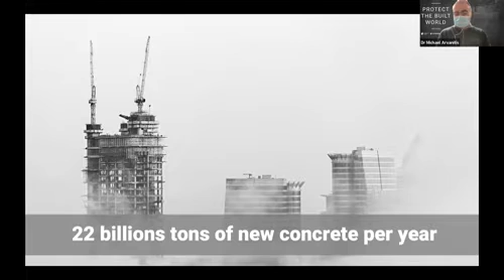So why do we really need to do concrete inspections? That's a very fundamental question that we have to ask ourselves. The main reason is that every year we have about 22 billion tons of new concrete being poured around the world. That's a big number. And out of this number, there are about 50 billion holes that need to be drilled. Why? Either for maintenance reasons or for expansion or for any repairs that need to be done to the concrete structure. So drilling a hole in concrete is never and was never easy.

You need to be very careful not to hit fundamental structure inside the concrete. That's where GPR is coming to help you. Because if you make even the tiniest mistake on the field and you hit, one wrong drill is enough to cause very costly damage to the building, to the structure that you manage, and can be very catastrophic for all.

So what we are suggesting is to use ground penetrating radar before you drill or plan to drill a hole into your concrete. We have 3 different hardware units that are combined with unique software and a whole ecosystem platform that can help you with your on-site needs. What you see on the left side of the slide is a GP8000. It's our workhorse ground penetrating radar that's being used to scan large areas inside concrete.

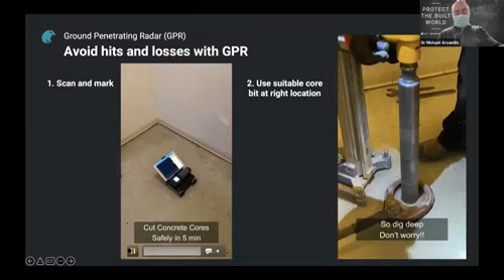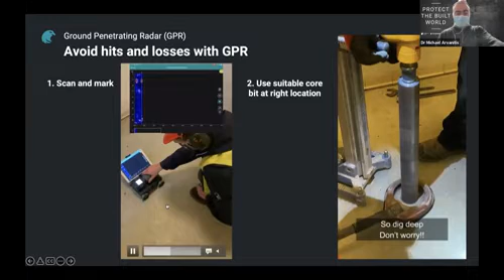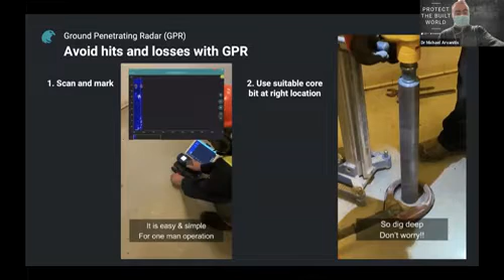The way we do that is that we have our ground penetrating radar. It's run by an iPad, so you can see the screen, and you scan and mark rebars. You just push or pull your equipment, you see the rebars on the screen, and then you mark where the rebars are. We do that in two directions, just to make sure that we see every single target, no matter if it's perpendicular or parallel to the direction that we are moving

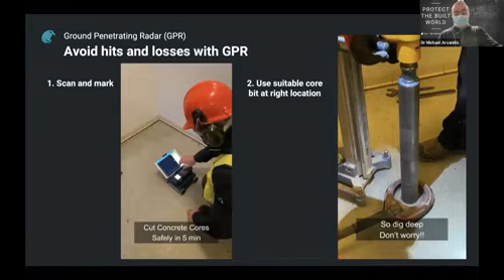the ground penetrating radar. And as soon as you have a small tomography of the area that you would like to scan, you don't need to worry anymore, because you are absolutely sure that the area where you're going to drill the hole is clear. So you can dig deep, like the video that we see here on the right side of the screen, and you can take the core from the concrete and so on.

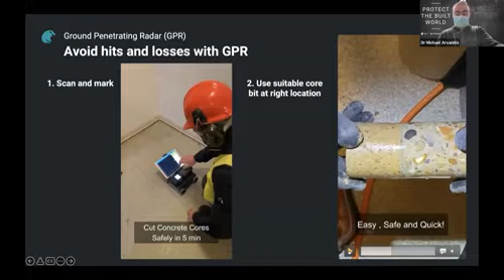So let's see the differences between the ground penetrating radars that exist in the market right now. We have two different, let's say, flavors of ground penetrating radars. One is the old technology of pulse ground penetrating radar, where you have a system that's very dependent on the frequency of the antenna that you're buying. So you have different frequencies in the market. You select a specific center frequency, and then based on that frequency, you have certain limitations on either the depth of the penetration or the resolution of your ground penetrating radar.

The rule of thumb over here is that the lower the frequency is, the deeper you penetrate, and also the lower the frequency is, the worse the resolution that you get. So if you need to find, let's say, deep targets, you need to go with a lower frequency. But the problem in this case is that the lower the frequency is, the resolution gets worse and worse. That means you need bigger targets in order for this to be detected. So this is what we call the frequency dilemma.

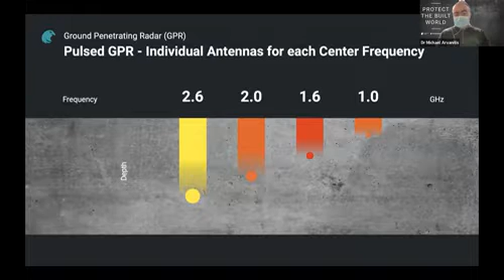And this is where we, as Screening Eagle Technologies, give an answer to this dilemma by introducing this technology, the step frequency continuous wave. So if you compare the SFCW to the pulse system, then in our technology, you don't really face the frequency dilemma, because what you have in your antenna is an ultra wideband antenna that can cover a wide range of frequencies from about, let's say, 200 megahertz up to around 4 gigahertz. And so you can see deep enough, but also you can see small targets like rebars or small cables inside the concrete and so on.

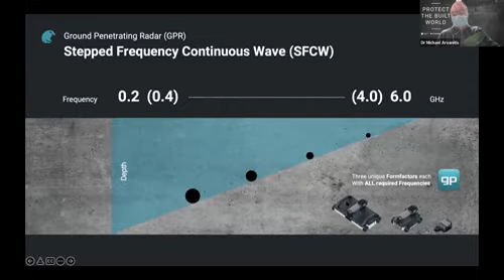And we have introduced into the market 3 different, let's say, flavors of our ground penetrating radar, depending on the needs of your survey. So if you have, let's say, a tunnel survey, you can use the GP8000. If you have areas that are tight and you don't have enough space, you can use the GP8800. Or if you have large areas and you need to scan them with one pass, you can use the GP8100. So let's see the differences between those 3. You can see the 3 different systems over here, okay?

All these are communicating wirelessly with an iPad, and you can see the data in different forms, which is very helpful if you're on the field. So you can see either the full radar version if you're an experienced user. You can see a migrated version of the targets where the hyperbolas are being removed. You can see a 2D tomography or a 3D tomography. And this is very unique to what we are offering, because no other manufacturer in the market right now can offer this type of visualization and also this type of ecosystem.

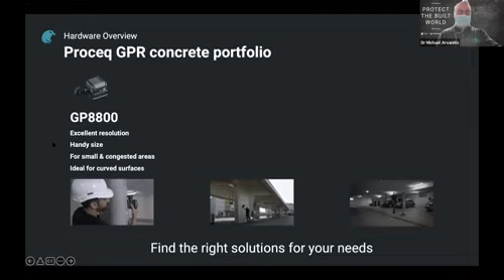So let's discuss in detail each of these three different systems and what they offer. So let's start first with the smallest in size. The smallest in size is the GP8800. It's a very small form factor antenna that carries a GPR inside it, okay? And it's very good for small and congested areas, or for curved surfaces. So if you have a curved surface, you can't really go with a typical ground penetrating radar because it can't really see the whole surface, okay? But this antenna is ideal for this, and it comes at a handy size, and it gives a very good resolution of the targets that you're looking at.

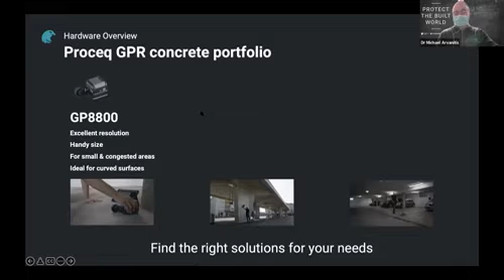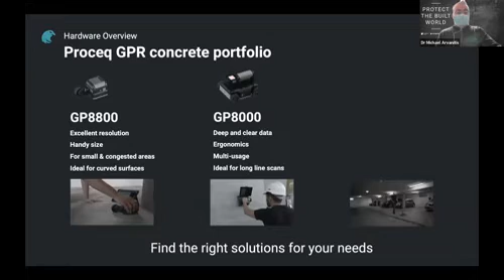Then in the middle, we have the middle size ground penetrating radar. It's the GP8000. It used to be our first one in the series. So this one can give you deep and clear data down to about 60 centimeters in depth penetration, which is more than enough when it comes to concrete applications. It has excellent ergonomics, and you can use it for many different applications, even for bridges or roads or tunnels. And it's very good for long line scans. So if you have a very long line, you can use the GP8000 just to scan this line.

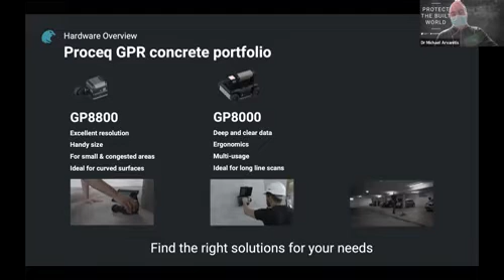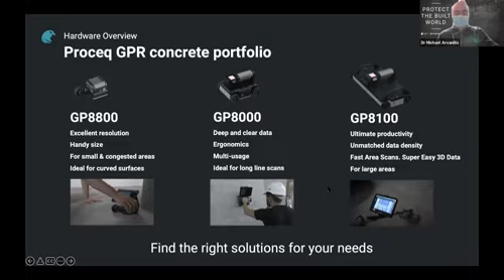Then, last but not least, we have the newest addition to our series, the GP8100. So this is perfect if you have large areas, if you need to scan areas quite fast, and if you want to take 3D tomography pictures directly on your screen. So based on the needs that you have on the field, you can select the right solution for you.

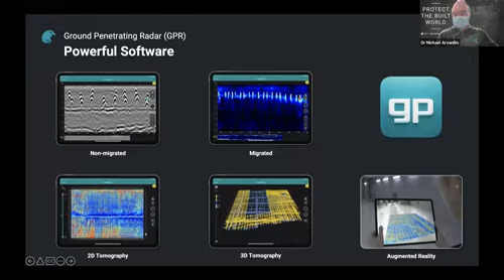So all this is being supported by our powerful software. So as I said before, you can see the radargram over here. You can see the targets at different shapes and sizes. So over here, it's a typical non-migrated radargram. Over here is the migrated, where we remove the hyperbolas, the 2D tomography, the 3D tomography, and of course, you can also play that on augmented reality on the side so people can see exactly where the targets are and get a clear picture of what's happening beneath. I have included some examples to show you with different units that I have collected.

So this is data with the GP8000. So you can see very high quality in both 2D and 3D, and you get quite good versatility. So I will stand a bit on this radargram over here on the left side. I don't know how experienced you are, but typically when we collect data, the first picture that we get from the subsurface looks like that, okay?

So what you see over here is a small, let's say tomography, a small picture of what's happening beneath the concrete. And you can see different targets that have different amplitude, okay? Some are metallic targets and some are not metallic targets. I can get information about their depth. I can get information about whether the targets are filled in with something or if they're empty, if there are pipes. I can get information about the concrete bottom, which is this one over here. And I can get information about the thickness of the cover, which is this thing over here.

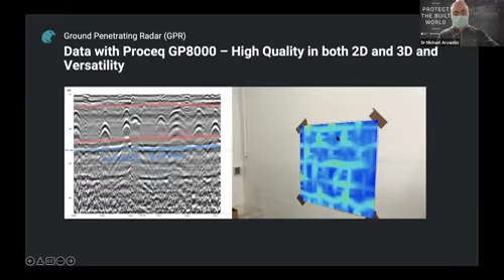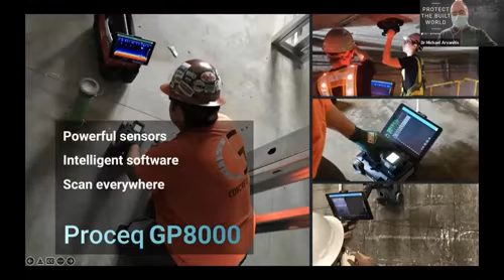And then when I'm done, if I collect several 2D lines, I can create a 3D picture and augmented reality and augment it on the real target where I need to actually drill the hole. So these are some pictures from the GP8000 in action. So you can see how people are using it. They have the iPad and they can see how the subsurface looks, like this one over here. They can scan ceilings like this one over here, or they can check walls and floors and so on. So you can scan almost everything with the GP8000.

Now, I have collected some data with the GP8800, and this is data collected from a very curved surface. If I had any other GPR, I couldn't really collect data because the GPR antenna would not really couple with the concrete. But the GP8800 is made for this type of application. So I can see data like this one over here, and this one over here, and this one over here. These are targets. So when I find the targets and I know what type of targets these are, I can select where and how deep I can drill inside my concrete, which is very important.

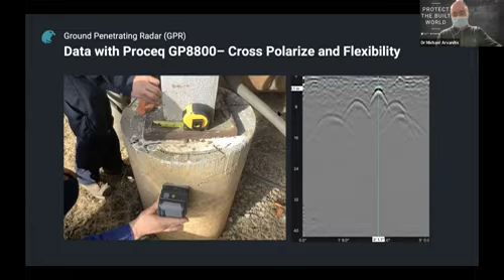Of course, I can get some other information like the delamination or corrosion that I may have. I can see also voids inside concrete and much other information that's relevant to my work on the site. These are different pictures from the GP8800. You can see how close it can go to the target. That's very important. You can get very close to the target.

You can see very close to a net, so you can collect data close to a net, and you can go in very narrow places like this one over here. Or if you need more flexibility, you can remove the battery and you can go to even more narrow places and collect data from there.

This is a very nice example from data collected with the GP8100. So this is really nice because with a single pass, I can collect 2D tomography pictures like this one. So you don't have to make grids anymore. You just go with your GP8100, collect a few lines, and then you get this tomographic picture, which you can augment on the wall or on the floor, on the concrete surface where you are looking to drill the hole. And then when it's safe, when you have identified safe areas to drill, you can go and drill without the fear of hitting something critical in the structure.

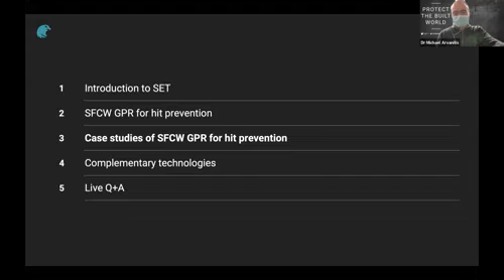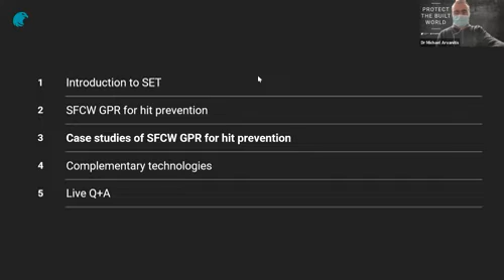So after that introduction and explanation of our GPR solutions, I'll now present some case studies which were collected here in Asia on using the SFCW GPR specifically for hit prevention.

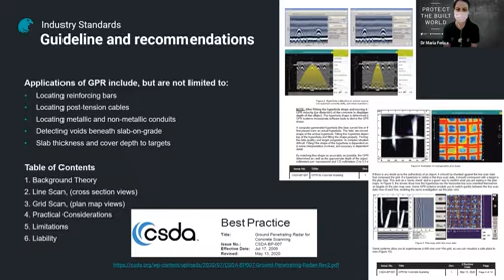However, before I share the case studies, I'd just like to bring your attention to this best practice guide from the US CSDA, so that's the Concrete Sawing and Drilling Association. So this is a document which is free to download from the website, and it gives some really good advice and information on using GPR for hit prevention, including what you can detect, practical considerations, limitations, and so on.

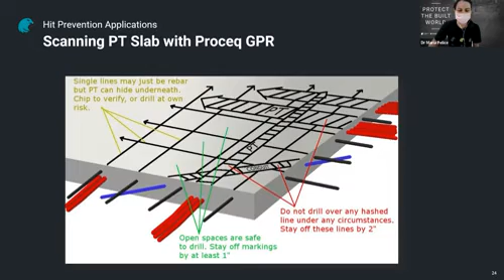So the first example that I'll show is from a post-tension slab. So when a slab has post-tension cables in it, it adds further complexity to the hit prevention challenge, because as well as the rebar, we have the post-tension cables, which can sometimes be hidden underneath. And also, it's obviously extremely important that we don't damage these at all, because they will compromise the safety of the structure. So in the first video here, we can see the GP8100 array being used.

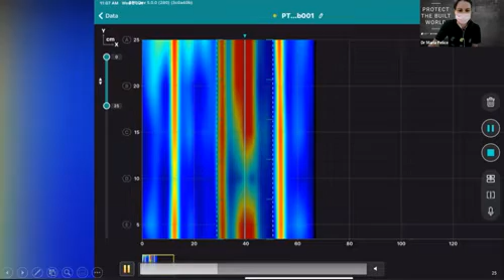Here we're just doing a line scan. So the benefit of having an array like the GP8100 is that even if we just do a line scan, we actually can get a top view or a C-scan view of our slab. And this is because the GP8100 consists of multiple antennas. So just very quickly, without doing a grid, just doing a line scan, we can still get the top view, as you can see there.

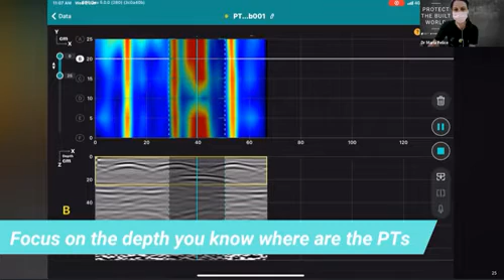And then for further analysis, as you can see in the lower half of the screen, we can actually get the typical cross-section to understand the positions of the objects. So here you can see rebar towards the top of the slab and the PT duct beneath it. And also in the top view, as you will see in the remainder of the video, we can actually choose which depth to focus at. So if you have an idea of where your PT is, you can actually focus just on that depth. So you can see here, now we see very clearly just the PT cables themselves.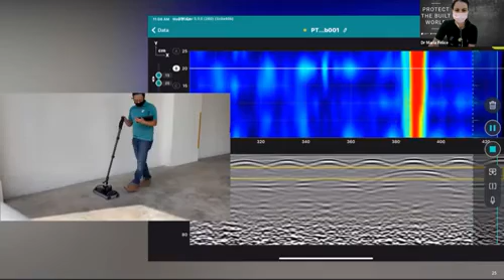So the next example is still a PT slab and also using GP8100, but now we're going to do a grid scan. And you can see once again, despite having to scan in 2 dimensions, very quickly, here we have the resulting image. So you can see this is the large area that was scanned. Here's a top view with the augmented reality function.

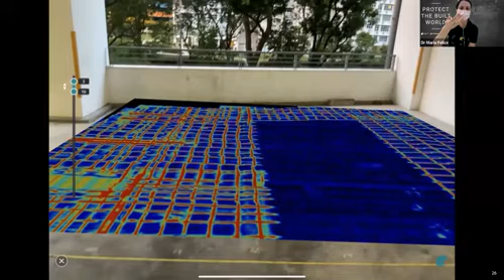So this means that instead of only relying on the physical marking on the concrete, we also have this representation which is saved on the iPad and which can be viewed with the augmented reality function so that we can actually see where our results are corresponding to the physical environment. And this is the 2D or C-scan view, and we can also have a 3D view as shown here, and we can use different colors to differentiate between the different objects.

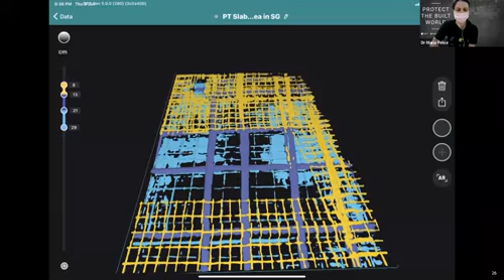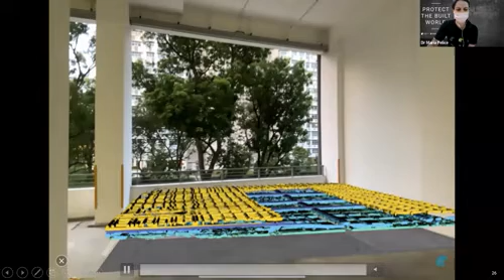So the next example is from a box girder. So this is quite a complex geometry. And what added complexity or the challenge to this hit prevention job was that the concrete had been cast quite recently, so it was still a bit moist. And anchor drilling needed to be performed into this box girder. So obviously the drilling was quite deep, but it was very important not to hit anything.

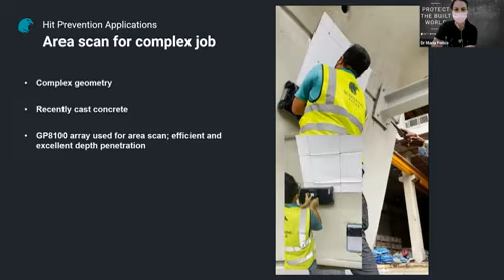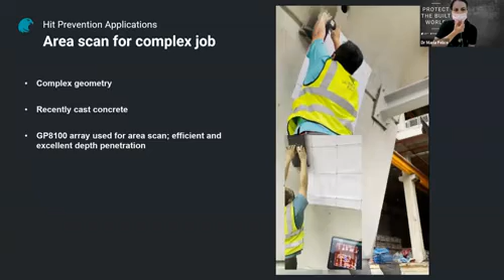So the GP8100 array was used to perform a quick area scan, as you can see in the video here. Due to the size of the array, only a couple of passes are needed to cover the 60 centimeter by 60 centimeter area. And you can see straight away there on the iPad, we get the image of what's inside the concrete. And because of using SFCW technology, which Michael explained, the depth penetration was still good, despite the moisture in the concrete.

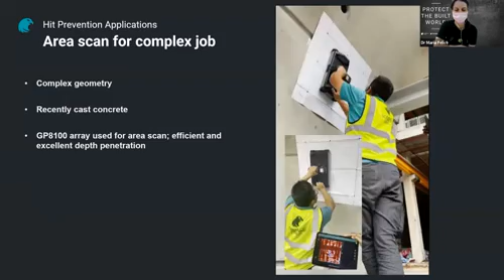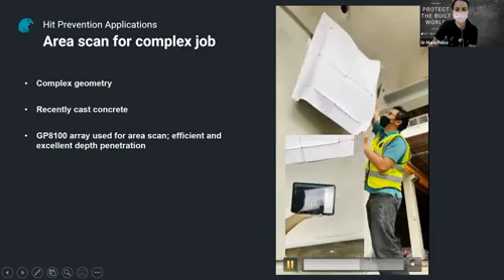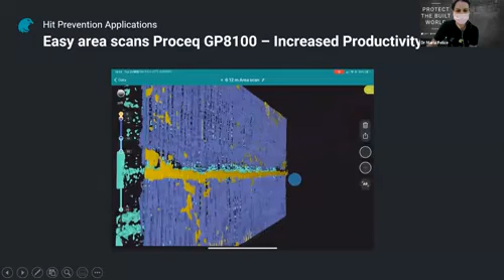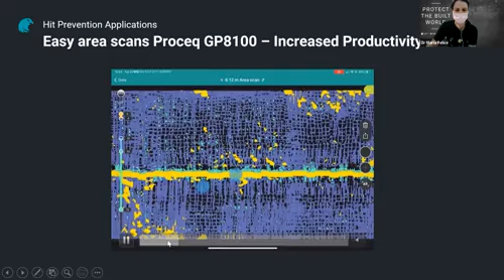So there you can see straight away a really good 3D image generated with just a few passes with the GP8100 array. This is going in just in detail. You can see the ease of use of using the iPad. So this is another example of a 3D image, and you can see the different colors representing the different objects, and also how easy it is to view the objects in 3 dimensions.

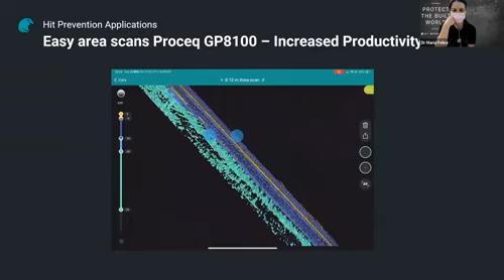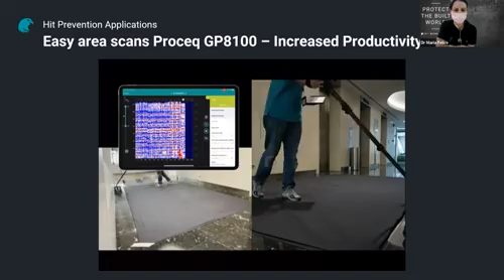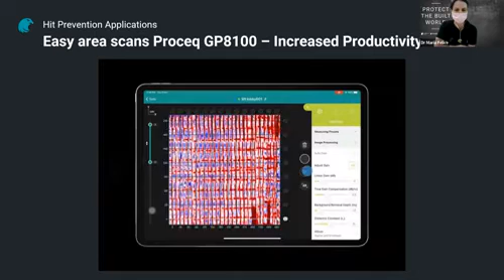And as well as marking, as I mentioned, directly on the concrete, there's also a traceable record of what has been detected thanks to the use of the iPad. Here you can see another video of the GP8100 in use on quite a large area. So here the grid has been marked out on a piece of fabric, so that's reusable, so much quicker than having to draw it out each time. And you can see once again a good example of a 3D image with the GP8100 grid scan.

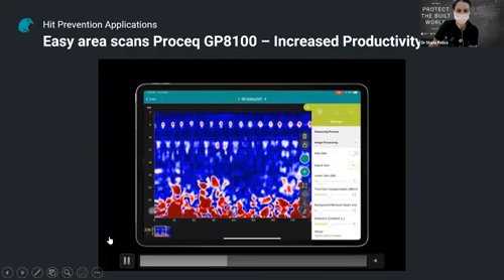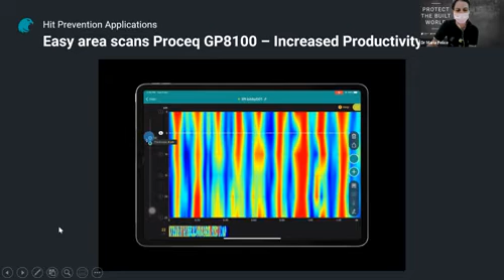And this once again is an example of this super line. So seeing one sweep using the GPR array. So that's the conclusion for GPR. But before we end the webinar, I'd also like to share with you some complementary technologies. So there are some instances where GPR cannot be used for hit prevention.

So the three complementary technologies are Profometer, GPR, and Pundit. So these use different technologies. So the first, for Profometer, we use eddy current. GPR is electromagnetic waves, and Pundit is using ultrasonic waves. So you can see there graphically represented, the Profometer is only good for rebar very close to the surface, so the first layer.

With GPR, we can see deeper, and we can also detect other objects, for example, PT cables, as we showed previously. And finally, with ultrasound, we can see even deeper, so several meters, and this is more sensitive to air. So it can be used to detect rebar and other metallic or plastic objects, but it's particularly good for detecting voids or defects.

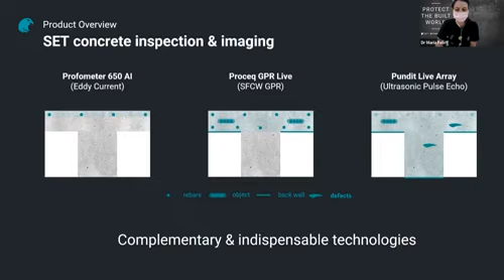So here are just some images of the instruments and what they can detect. So you can see Profometer can only do rebar, so it can detect and even measure rebar, but that's all it can do. Whilst GPR is more versatile, and the Pundit array using ultrasound is mostly for defects.

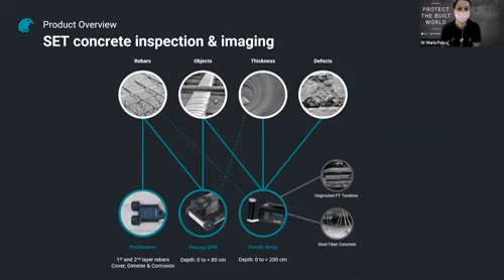So comparing GPR with the cover meter, so our brand name is Profometer for this. So the cover meter uses eddy current technology. As I mentioned, it's used for the top rebar mostly. And what it's predominantly used for is for measuring the cover. So this is measuring the thickness of the concrete from the surface to the top of the first layer of rebar. And it's also the only device that can estimate the rebar diameter itself. So you can check the rebar grade that has been used.

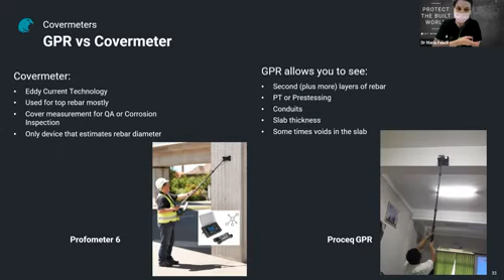And then complementary to this is GPR, which uses electromagnetic waves and is an imaging technique. And we can see the second and even more layers of rebar. We can also see other structural elements such as PT cables, also conduits. We can get an estimation of the slab thickness and sometimes even detect voids within the concrete. So you can see here the cover meters can do measurement of rebar very well, but that's all they can do, whereas GPR is more versatile.

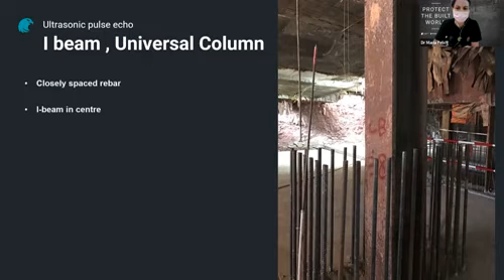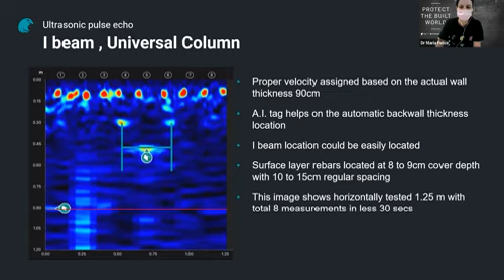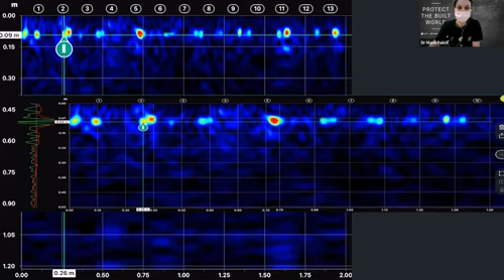But here we could see right through to the back of the slab. We can also see the rebar, and later we'll look at these in detail. And then here you can see 3 points which indicate the position of that I-beam. So the 2 points and then the flat part in the center. And here, if we look a bit closely at the rebar, they're actually very closely spaced. But with the ultrasonic technology, we were able to resolve them. And this is probably something that would not have been possible if we had just used GPR.

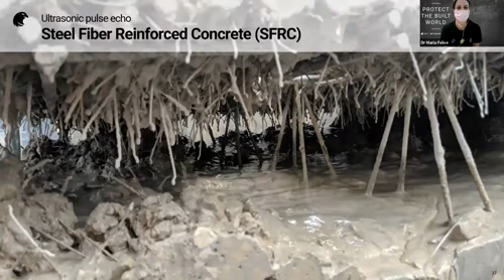So another very common application where we use ultrasonic pulse echo for hit prevention is for steel fiber reinforced concrete. So this, as you probably know, is concrete which has very small steel fibers distributed throughout the concrete. And because the electromagnetic waves are reflected so strongly from metal, GPR doesn't perform well at all on this concrete, because the results will be very fuzzy, very blurred, because the metal inside the concrete just reflects the electromagnetic wave too much.

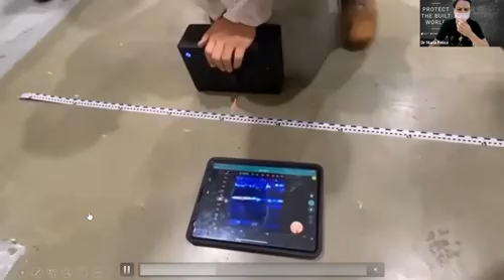So here I'll show a video of the ultrasound array, our Pundit array, being used to check for structural elements in a slab. So this was an industrial building where they were going to install some machinery. So they needed to obviously avoid the structural elements, but they couldn't use GPR because it was steel fiber reinforced concrete. So instead, I'll just play it again, you can see they used the ultrasonic array. And here very clearly you can see the back of the slab and the objects in between. And the metals, so the steel fibers, don't distort the image. Whilst with GPR, the image would definitely not be this clear.